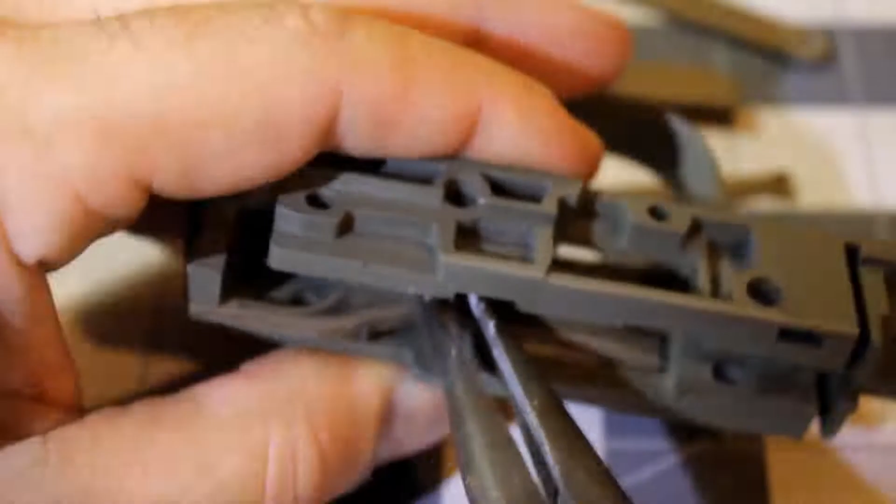My name is the Gun Psychiatrist, and we're back in this first part where we are going to cover drawing and extrusion of basic shapes in Fusion 360. So if you haven't watched it, I would probably check out the introduction to Fusion 360. If you don't need introductions like me, well, just know you're watching the right video. Anyways, we're going to not waste any time and go ahead and get right to it.

So we'll start by opening up Fusion 360 and start with a blank model. Here we are. As explained in the intro, there's several variations of different things you can use up here. And today we're going to be using the sketch feature. So this is going to create a 2D sketch across one of these three origin planes. Right here, right here, or right here. So you have a bottom top plane, you have a front back plane, you have a left right plane.

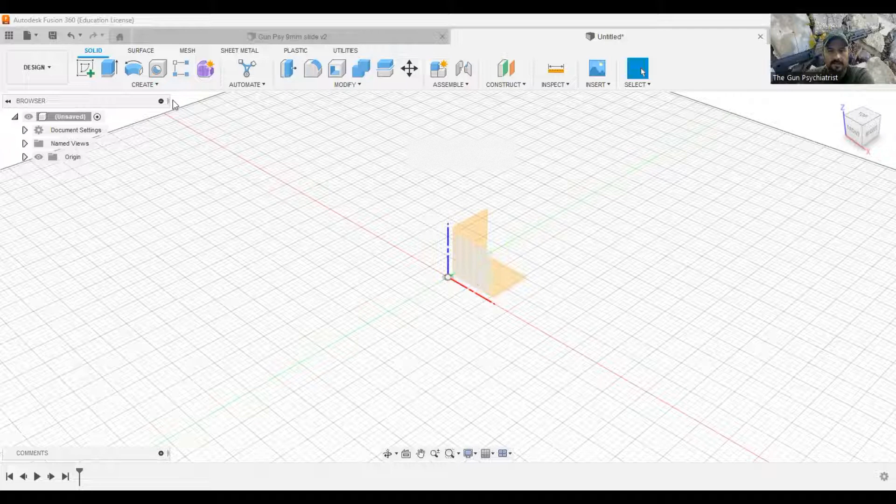So today, why don't we start from the front? And let's think of any object that we can model from the front. How about this bottle of vape juice? This will be good because this will give us a revolve feature. So we're going to start from right here. So let's say I don't have any measuring tools, but this bottle right here is probably about 4 inches long and maybe an inch in diameter.

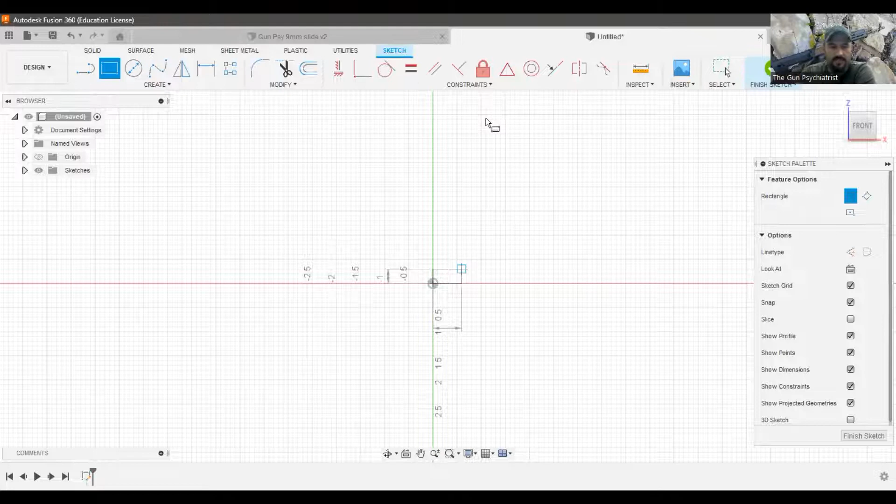We're not going to draw the full bottle because right now we're just looking at the front of the bottle. So we need to make something that looks like this bottle from the front. So we're going to grab our line tool, okay? Or we can even grab this 2-point rectangle tool. Sometimes this is a little quicker to use if you're in a pinch. So let's call that 4 inches by 0.5.

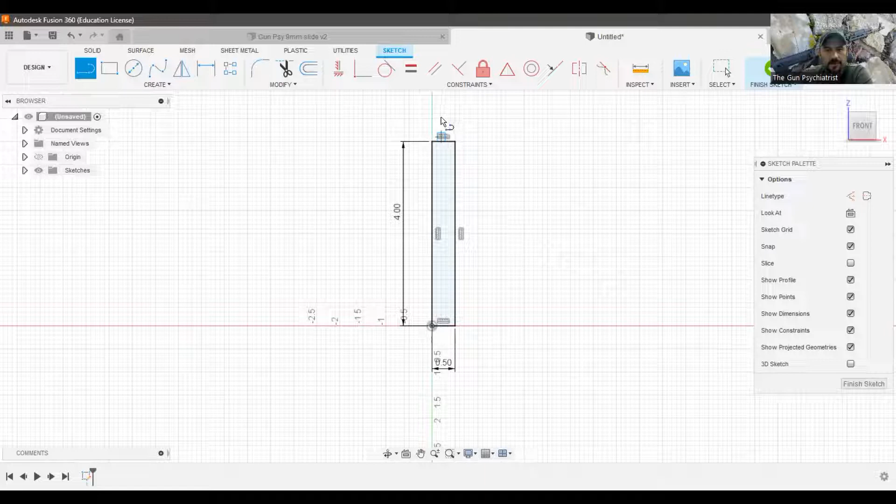Okay, and there's a reason we're doing this. We're only going to draw half this bottle. Okay, so we have our 4 inches there. We have our ½ inch here. And then we're going to take this and run this up about a ½ inch, come over, come down. What we're going to do is we're going to start removing some of these lines because, of course, this bottle is not a ½ inch thick. It's a little smaller than that.

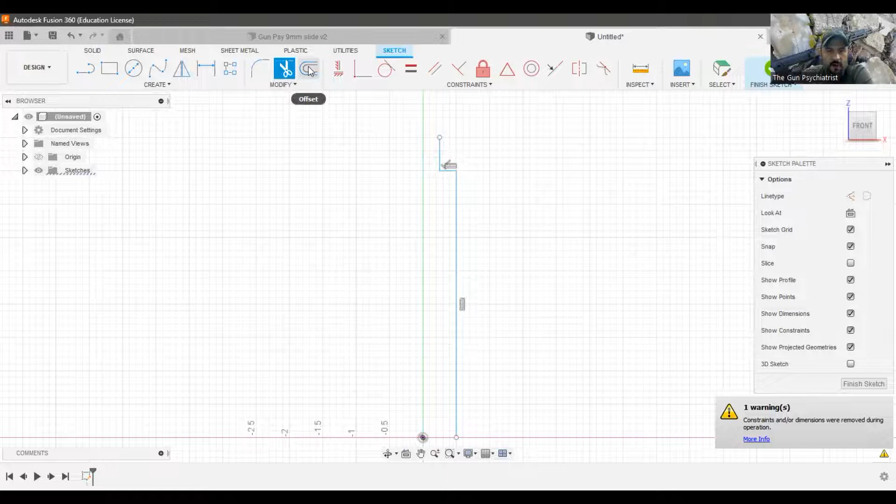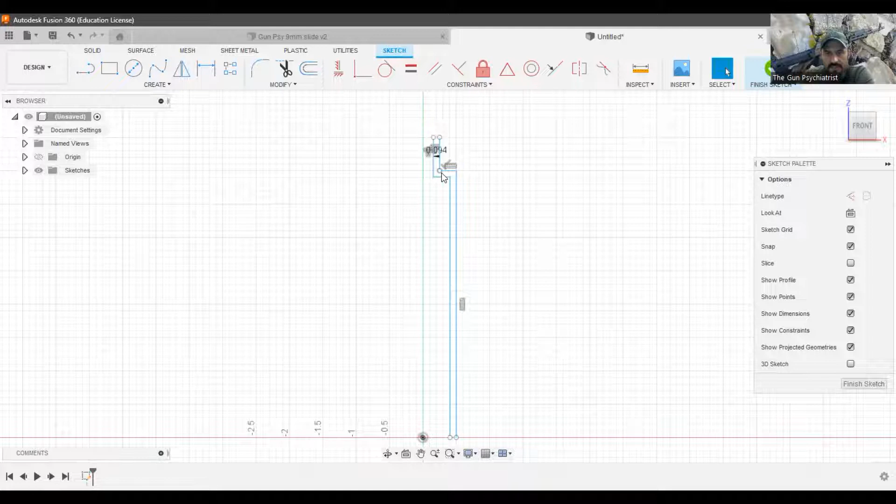So we have our shape here. And the first thing we want to do is use this offset feature. You can either click it or you can type the O button on your keyboard. If you type O, we can select this line. And let's just say the plastic is 3/32, so 0.09375. Okay. And it offsets this bottle. However, we're not that square right there.

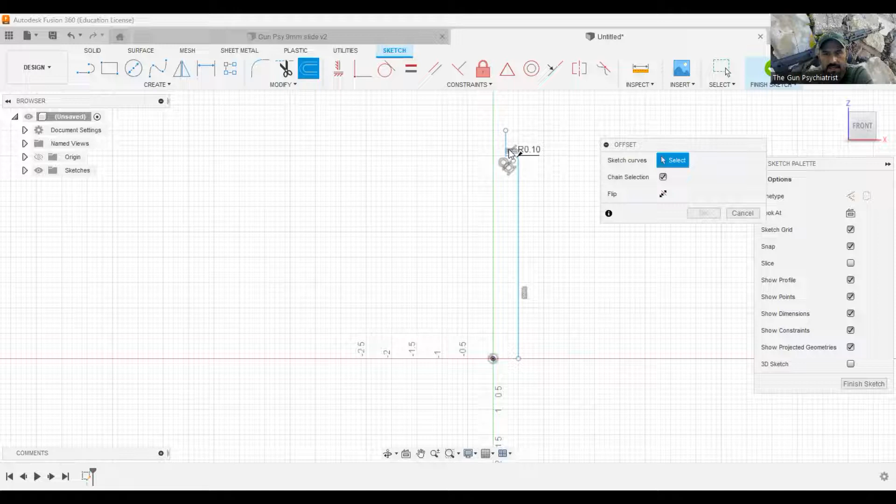So we're going to go back and we're going to use this fillet feature. Okay. And we're going to make a fillet right there. I like that much better. And that's going to be perfect. So we have our fillet. We're going to go ahead and do an offset again, 0.09375. And if you see, it's going to give you a slight fillet.

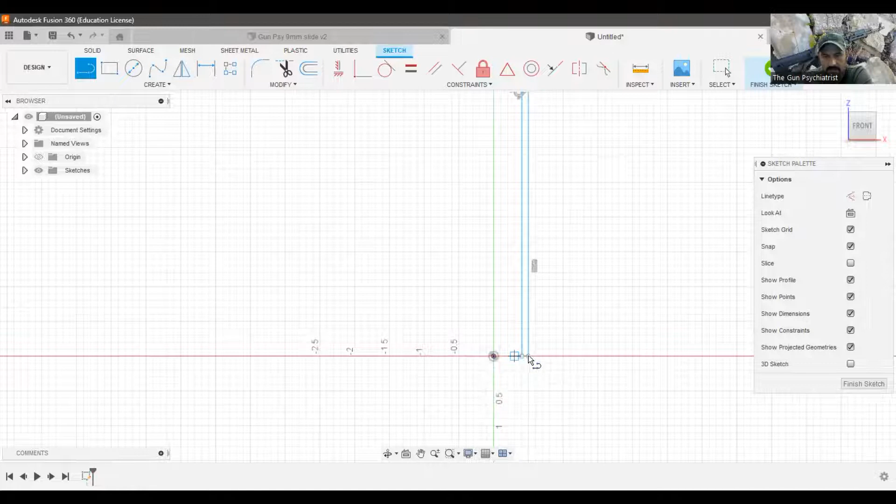Next thing we need to do is draw a line across here. We need to seal this up. In order to extrude anything in Fusion, we need to have solid lines. This way, this object turns light blue like that. That's how you know it's sealed in and it's able to become a solid object.

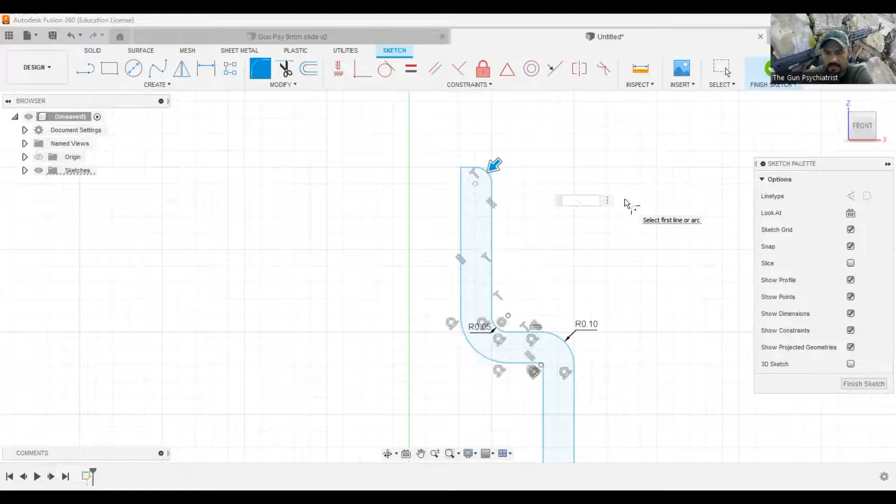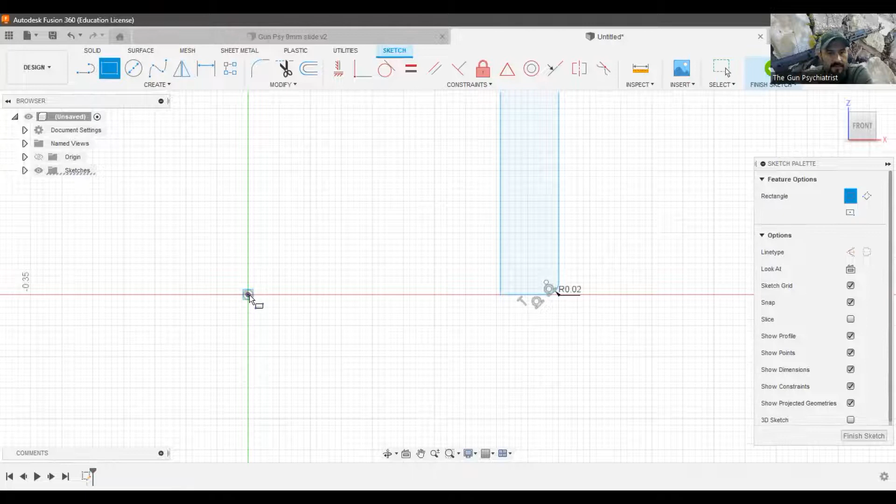And we're going to put a couple more fillets in here. I don't want to offset it. I want to fillet here and here. Okay, I like that much better. All right, 0.01. 0.01. We're going to run another fillet here. 0.02, like that. And one thing that we need to do from here is we need to create a bottom.

0.1. Okay, and we're going to wipe out this edge right here. Maybe do a fillet here. All right. Now we have our general shape. We're going to go ahead and finish the sketch.

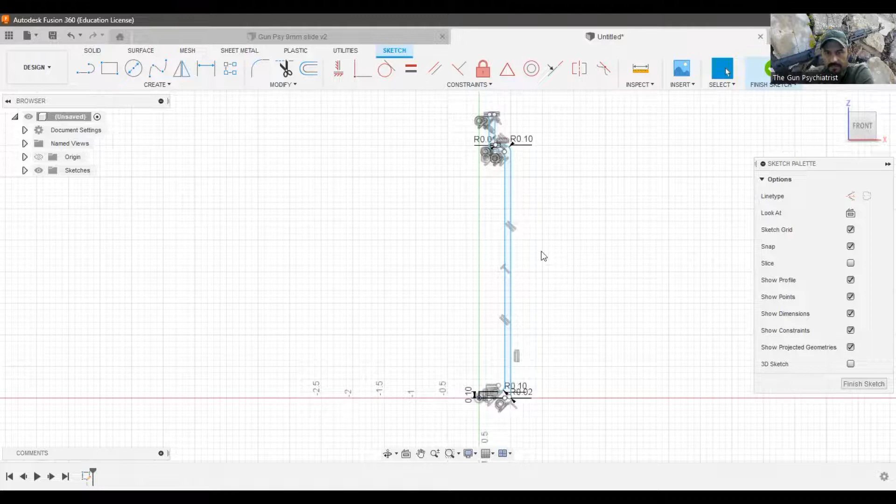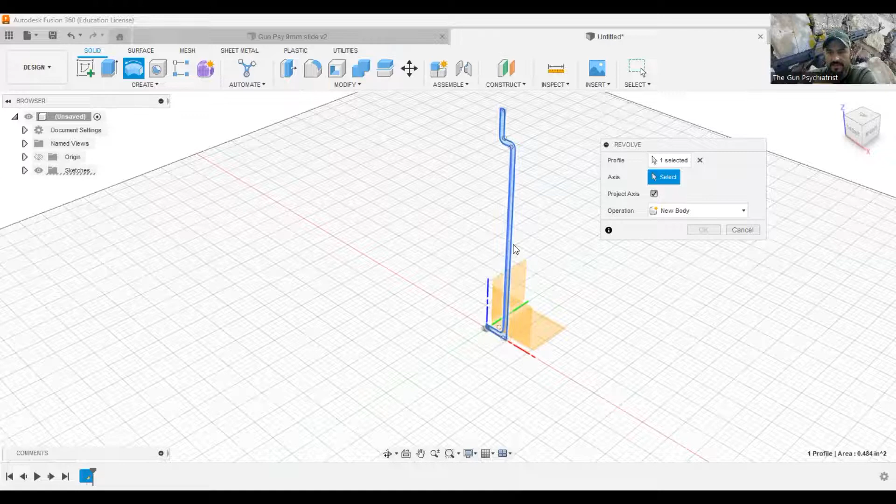We can either grab our origin because we're going to need the axis using the revolve tool, or we can hide it. And I'll show you a little trick that you can use if you have a line that runs on the revolution of the axis. So we have one profile selected. Then we need to find an axis. So we can either pick this blue Z up line right here, or we can just zoom in on this and pick that. Okay. And that makes a bottle. Here you go.

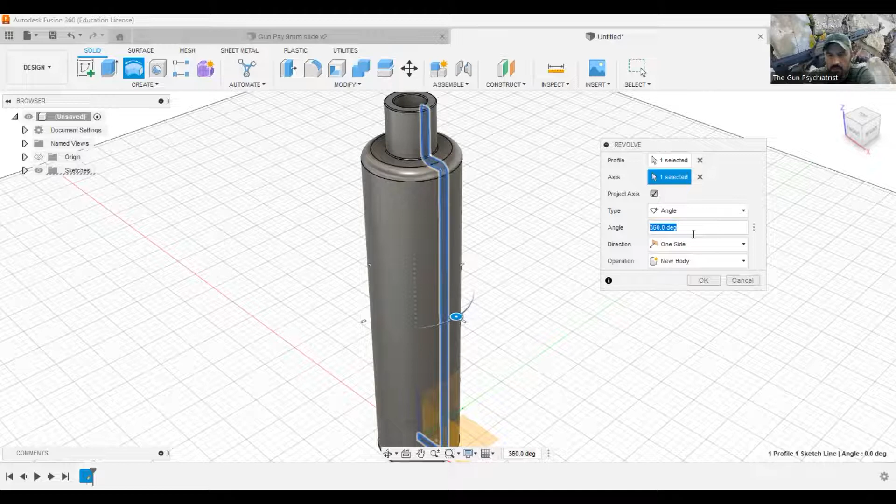If you don't want to do a full bottle, you can choose the angle to what you want to revolve it at. And this is where this would be changed here. So instead of doing full 360-degree revolution, say we want to do 90, okay? So now at 90 degrees, it creates a quarter of a bottle.

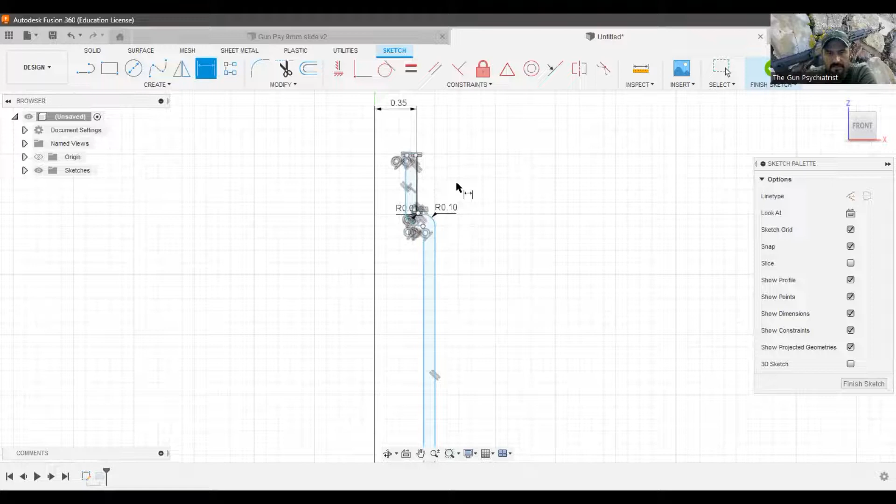Let's go back and constrain this. We're going to start from the 0 position, and let's constrain this here. Call that 0.35. I like that much better. All right, we need to run a constraint or dimension from the top to the bottom, which is going to give us 4.5 inches. So that is an example of using a sketch to revolve a feature.

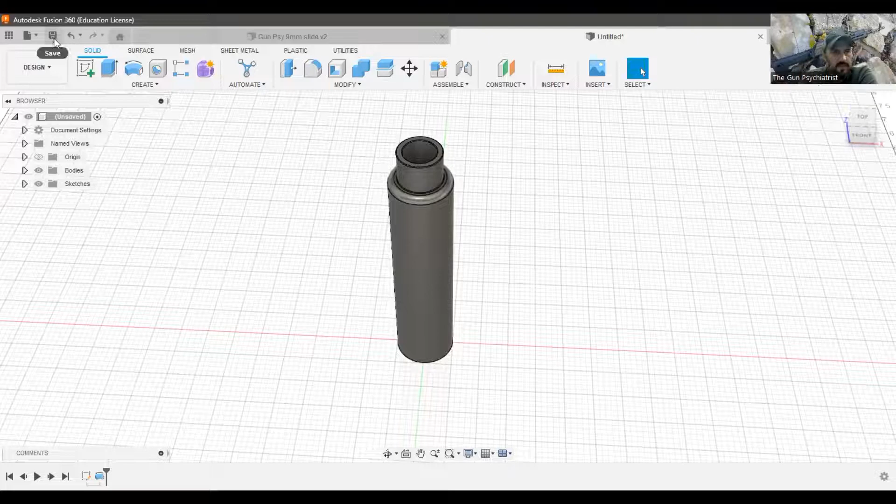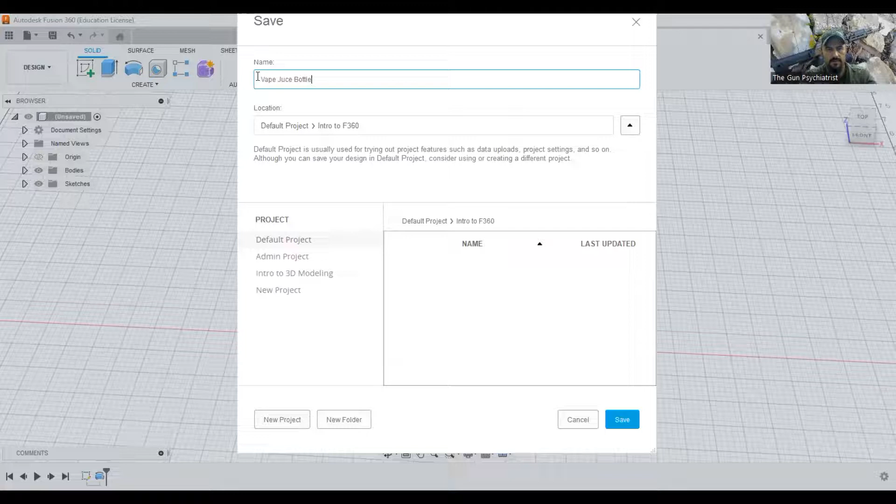Let's just do a standard base feature. So we're going to pick this, and let's just pick the top, for instance. Say we want to do a square. We can do a center point rectangle. So if you remember going back to high school, where you did graphs of X and Y, this is the same thing in theory.

So this is your origin point, or point of 0 and 0. When you move up in the Y direction, you're going to grow positive. When you move down, you're going to grow negative. When you move right in the X direction, you're going to get positive, and here you're going to get negative. None of this really matters except for where your model is going to sit on the workspace.

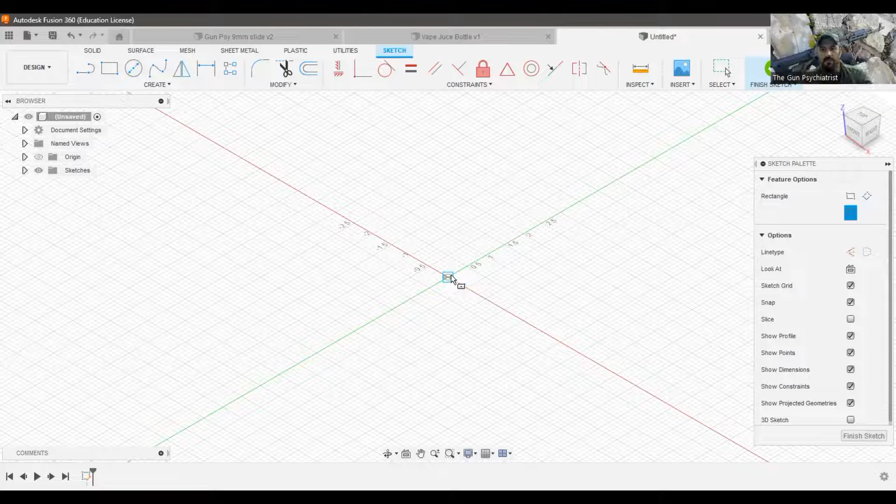Okay, so you can start something over here, you can start over here. None of this really matters, but it's great to have this origin point, because this is a fixed feature in the program that you can base all measurements off of. In this instance, we're just going to go ahead and do a free sketch.

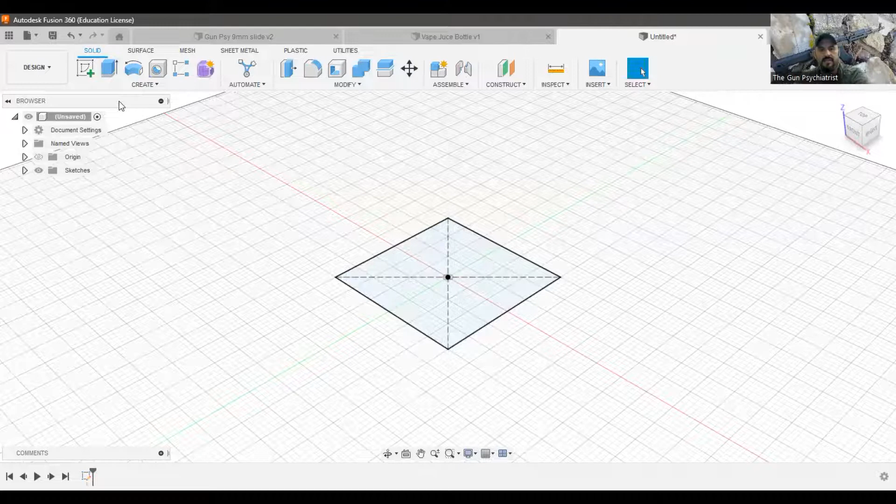Let's make a square. Let's just say 3 tab 3. When you hit the tab button, it allows you to go back and forth like that. We're going to make a 3x3 square. Okay. We're going to hit finish sketch. And now we're going to extrude, which is this button up here, or we can hit E. And let's just say 3. So now we have a 3x3x3 square.

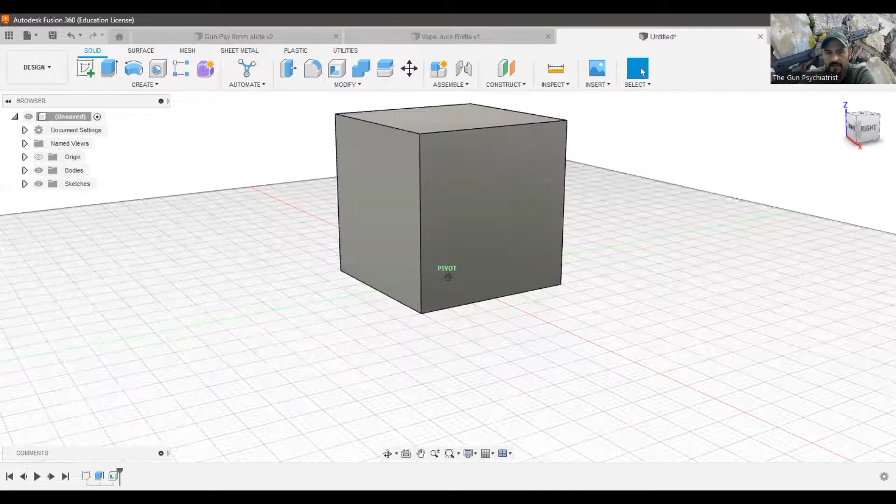There are some features that we can use, like the shell feature. We can shell on the inside and say we want the minimum wall thickness to be 0.25, a quarter of an inch. Now if we look at this box, see how the shell feature has shelled out this box? It's hogged out all this material, so we have a little box now. That's how you use the shell feature.

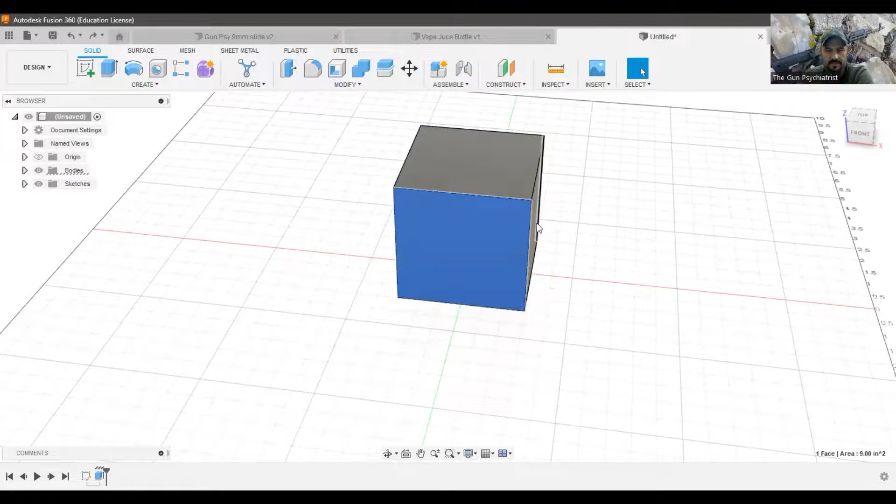And if you want to do more sketches, you could continue to extrude from here. You can use the origin points to make new features, or you can use faces; each side of this 3D model is called a face. So if you wanted to create a sketch off of here, this is going to be your new sketch surface. That starts a new plane, and that's where you will sketch from.

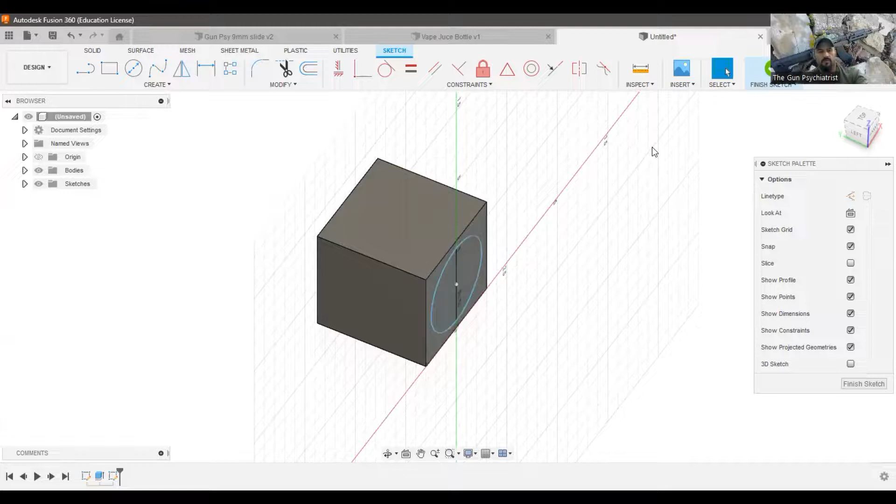So if you took this and did a circle, say a 2.5 diameter circle, and you wanted to extrude it, you just click this, and now you have a 2.5 diameter circle. This join feature down here does some interesting things. Join will actually make this new extruded feature become a part of that rectangular square feature right next to it. If you don't want to do that for whatever reason, you can just click new body.

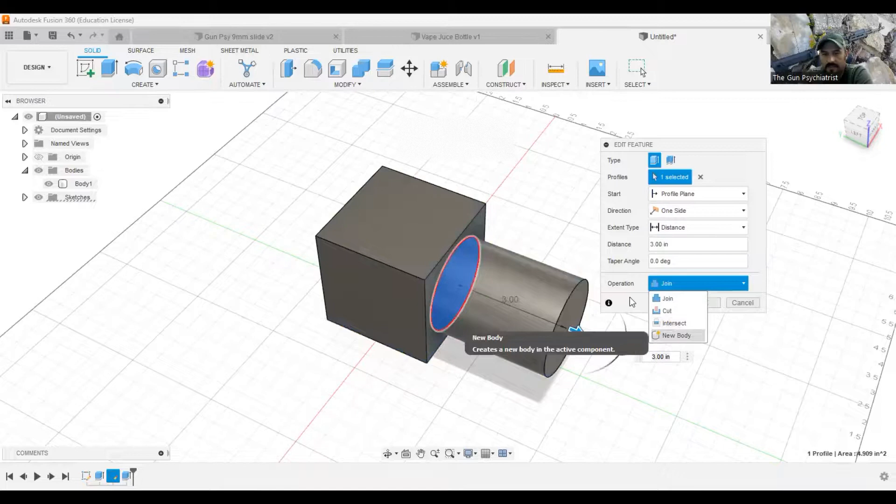Now the new body will actually create an individual body up here. So instead of there being body 1, you're going to have body 1 and body 2. Similarly, you can select component, if you want this to be a completely different component. But right now, let's just do join. So now you see body 1 is still one solid piece. However, if we had done new body like this, we now have body 1 and body 2.

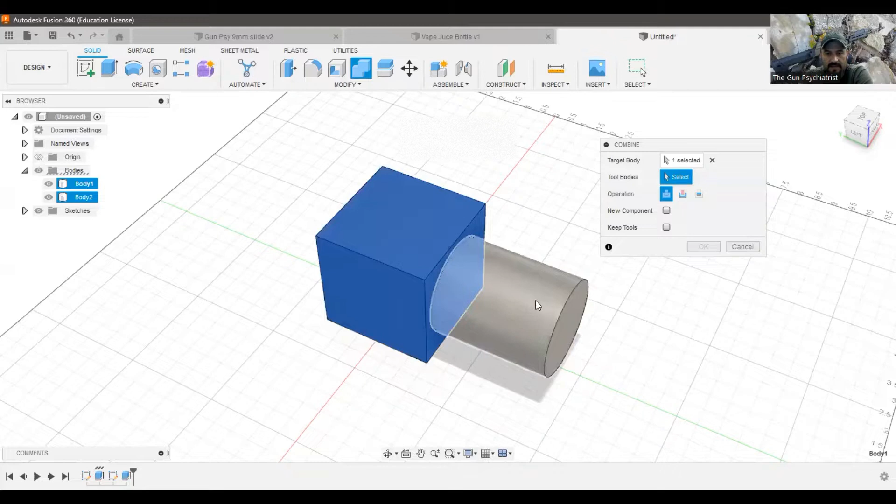If we want to join these down the road, you can go back to your extrusion, but sometimes you get a timeline down here on the bottom of the screen that's so long, it's hard to find that. One thing you can do is use this combine feature by selecting this and then selecting the tool body you wish to combine to. You can keep your tools, basically your sketches and everything, and you can make it a new component. But for right now, we're just going to say okay. So now, once again, this makes it one body.

So that was a basic overview of sketching and extruding. There's a whole lot more to cover, so we're going to pick that up in the second video, using some of the cooler features, such as the sweep tool and rib tool and a few other things. I'm going to show you how to use those in the next video.